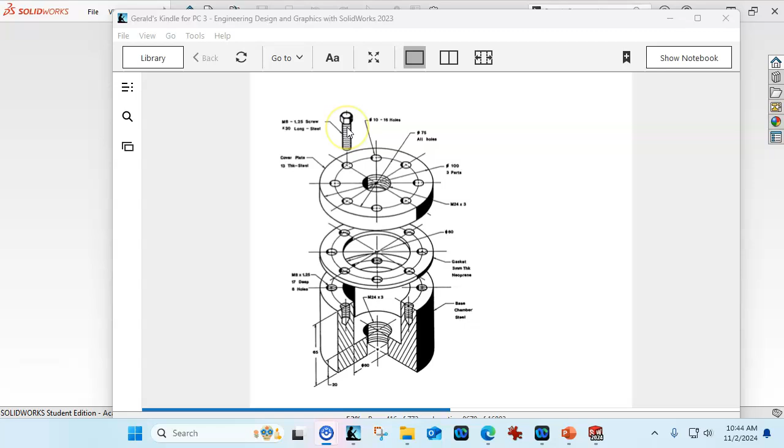So something like the hex bolts, we would add that to the assembly, but there are some limitations to the multi-body. So if there's more than about 3 or 4, maybe 5 parts, let's go ahead and open up the metric part. We're going to probably be better off with top-down. There is a limitation with the multi-body that at a certain point the complexity just doesn't help to build in more bodies. All right, so I'm going to draw the circles.

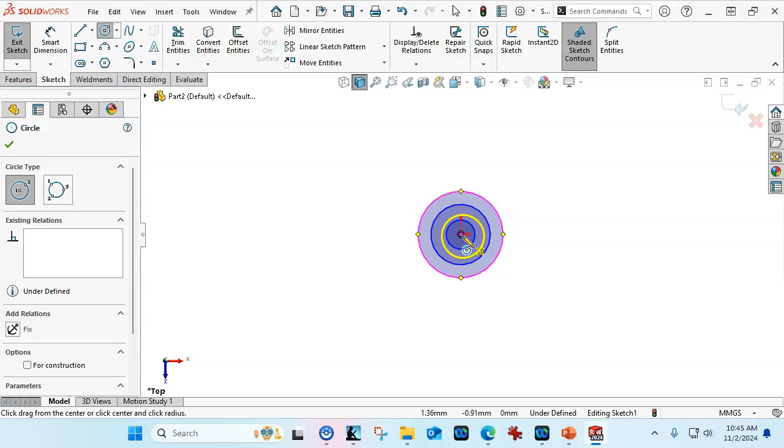So the threaded hole, the bore, the bolt circle, and the outside. So we should be able to go 100 and 75 and 60. And then we want the minor diameter for the thread. So 24 minus 3 is going to be 21. The outer segment, let's see, we had, just going to check the number. So this will become the bolt circle.

And I would like to go ahead and build in the pattern for the bolt. So just dropping a point, and then do a circular sketch pattern, and we can pick the point to pattern, and we want a total of 8. So we'll put those in.

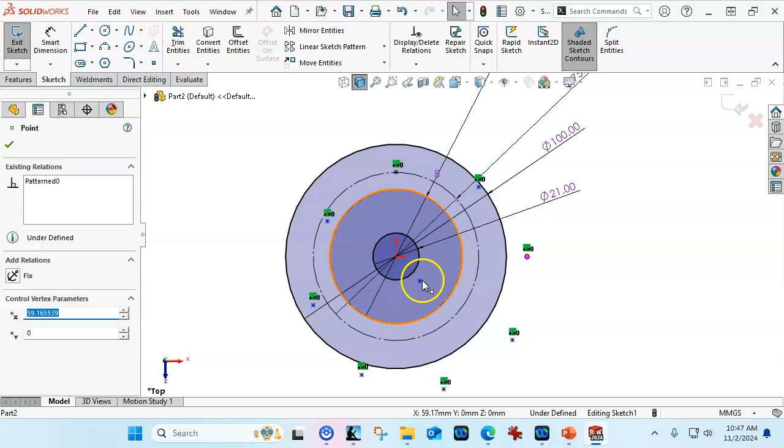All right, so the thing to be aware of is often the sketch pattern. Oh, I jumped before I could do it. Let's see if I can undo. Nope, it's going to drag that out. I think it snapped the point at the center. So, well, let's try that again. Let's see if my redo works. All right. Okay, so I can drag it out. There we go. The center point, if you're in the hole wizard, you do want to watch out for that center point because it's going to add a 9th instance.

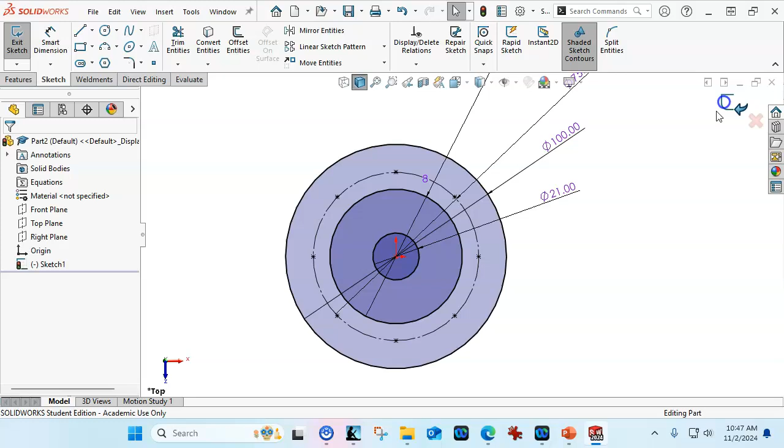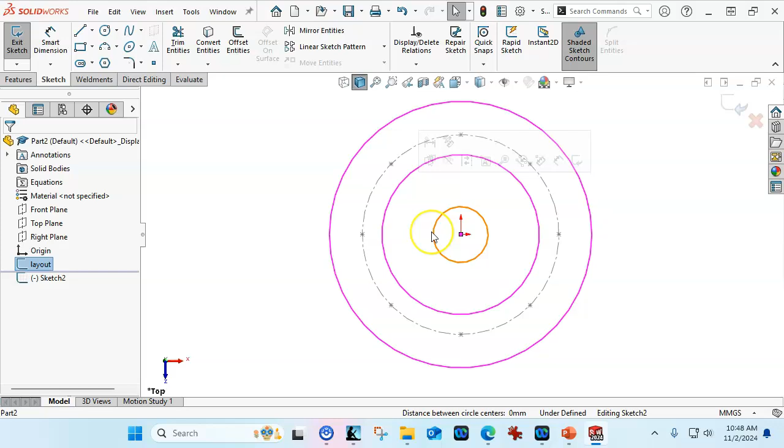Advantage of a regular sketch is that I can drag it to the origin and place it, and it's going to go fully defined, or I can drag any of the points back to my bolt circle and not worry about dimensioning the angles or dimensioning the radius out of that command. Okay, so out of our geometry, this is going to be my layout sketch that we're going to start making features. I would like to drive everything from this sketch, but I don't want it to be in the part, so to speak. So let's go with converting the entities, and we'll build those up with our geometry.

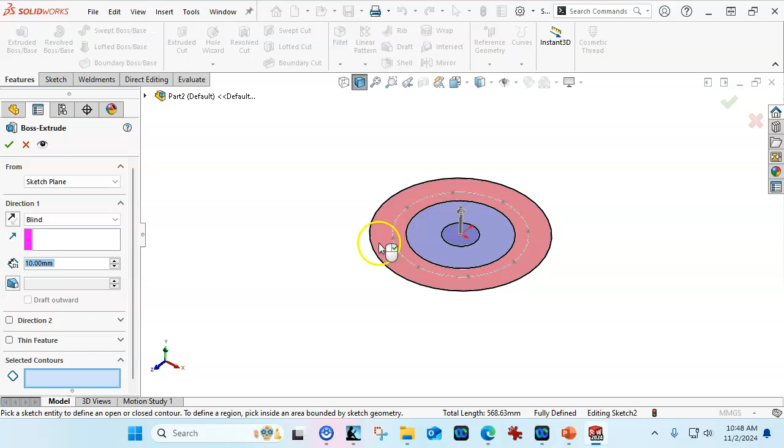So I could also make another sketch that has all the heights, but let's go ahead and extrude these out. So since there's multiple regions, we'll go 65 on the height, and then expand that out and share the sketch. So this is going to be our cosmetic thread side, or the side that we would add the hole wizard to. So let's go ahead and extrude that out. Sketch 2 automatically gets selected. I don't really like leaving those in there, so delete that out and go to 20 on the height.

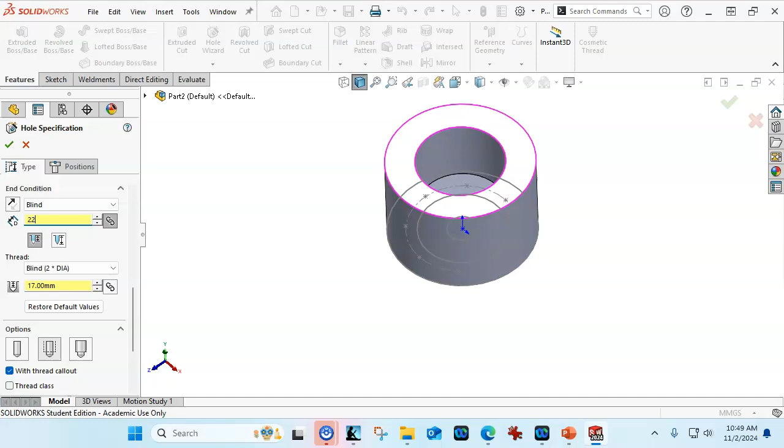For the hole locations, then let's go to the hole wizard, and we're going to pick metric bottoming tapped. We're at an M8 by 1, so that's a fine thread, and go a little more coarse. We'll go blind 17 millimeters deep on the thread. So then we should go a little deeper on the tapped holes so that there's more than enough geometry.

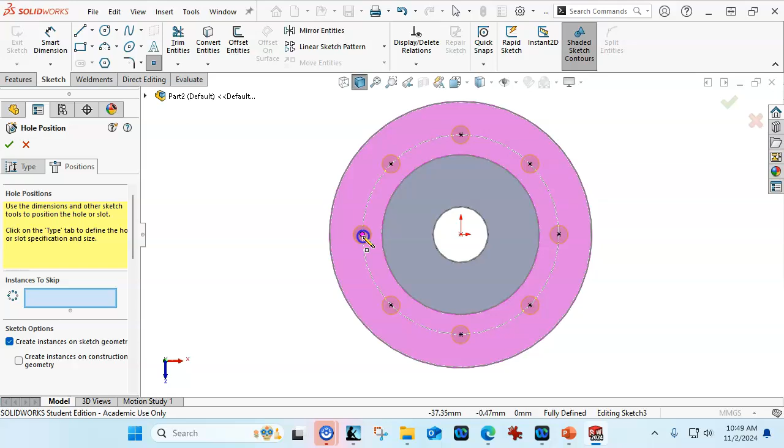All right, so if we get the 2D sketch, 3D sketch, we need to make a selection. Otherwise, we're in the point command, and we're just going to go along and add those points, making sure that they go coincident to our bolt circle. All right, so on this geometry, I would like to go ahead and add that to a new folder. So this is going to become the pressure cylinder base. This would also probably be a good time to go ahead and save this.

So let's find our way to our project folders, and we're going to do a new folder, assignment 8, P6-7, and this is going to be the pressure cylinder.

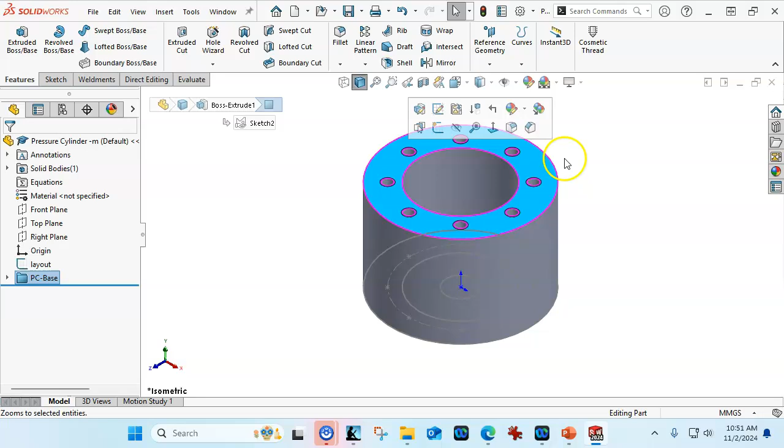And because it's a multi-body, I'm going to put a -M or some designation that lets me tell them apart. Because if I name the assembly and the drawing pressure cylinder, there's going to be associativity back to this part. So if I open up a sketch on this part, the risk is that if I delete or have to change this part drastically, it's going to affect the downstream parts.

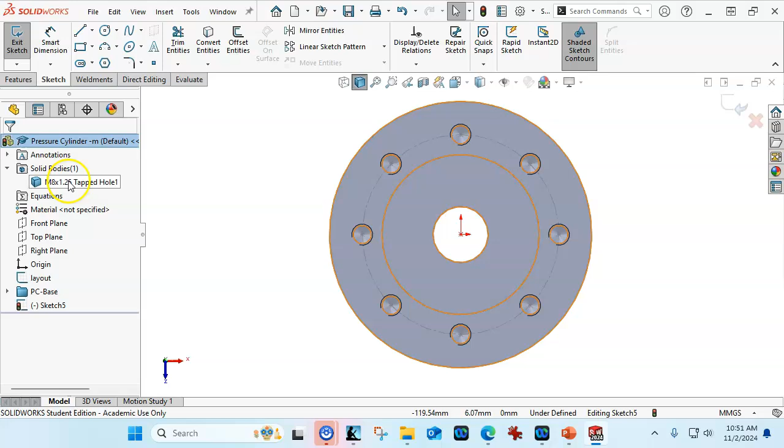So when we do top down, I like to have a single point of failure with multi-body, and maybe can mix it up a little bit more, but you're going to run into those types of issues with our geometry. So since I'm here, I'm going to go ahead and name this base and then hide it. So I opened up a sketch on the top of the base, and that's where I'll be drawing from.

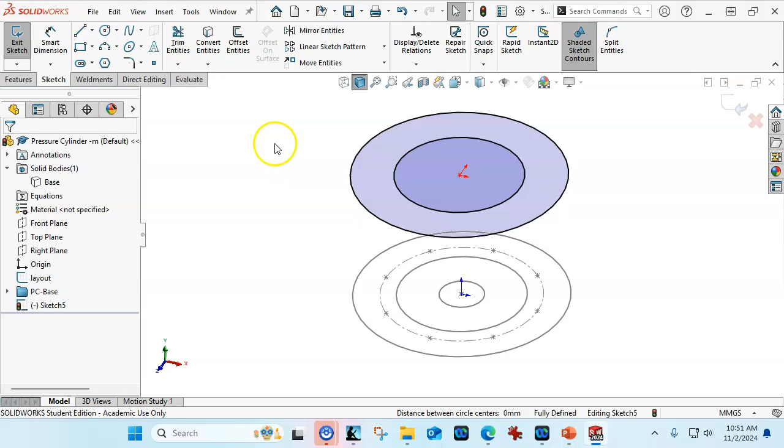And when I go to my gasket, we will convert those entities, and it puts it on top of the base, and then we can draw the circles. We've done Control C, Control V before. I could also pattern these, but if I do a Control C and a Control V, those are getting close, even though I'm picking, they're not going fully defined. So just be aware that on your geometry, you are going to have to go back and add those relations.

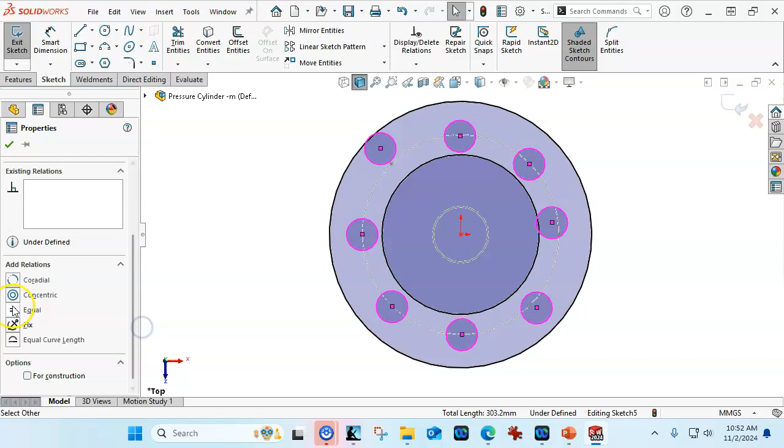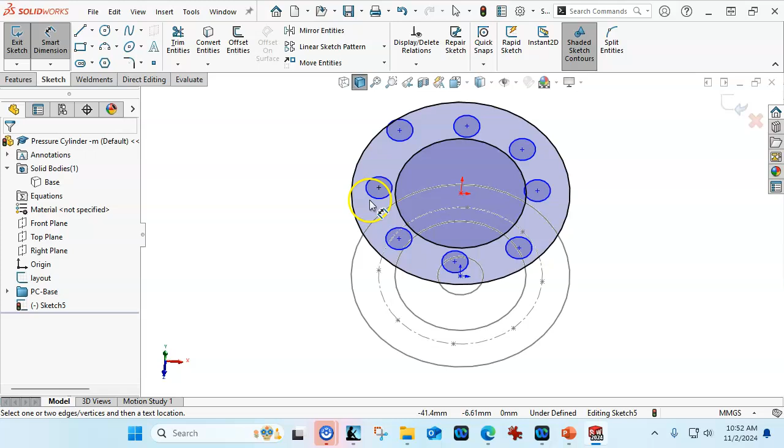So we're going to set all of these equal. And then for an 8 millimeter clearance on the gasket, I might even want to have a little bit of interference to the thread. And that does not look like it applied equal. I don't have anything in the existing relation. I don't think it grabbed it. So no, that one. All right, well the test will be to add a dimension, and we'll go like 8.2, and they did all change. So even though I was expecting to see that existing relation, it did get it.

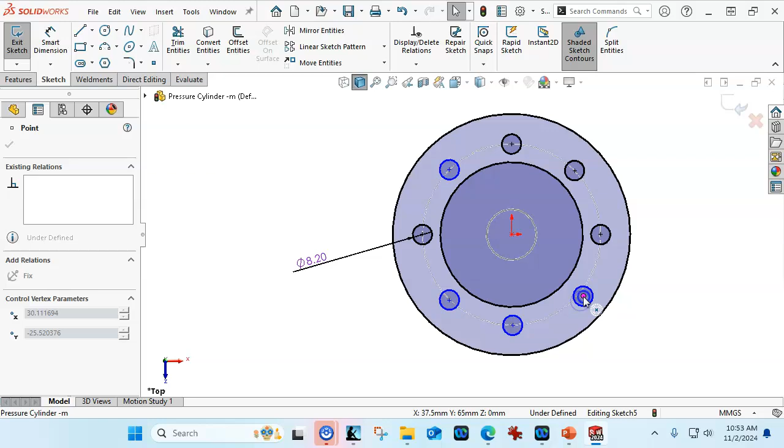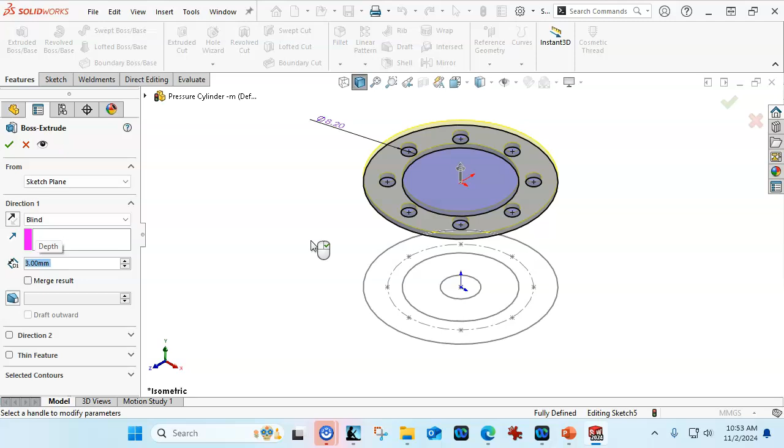So we're just going to go back and add these. So advantage is going to be to the sketch pattern, but if you want to tie it to these points or drive with these points, there are some options available. Okay, so that's going to extrude 3 millimeters, and we'll go ahead and accept it, and then that becomes the gasket. Okay, and once again, we'll open up a sketch on the top of the gasket and then immediately hide it.

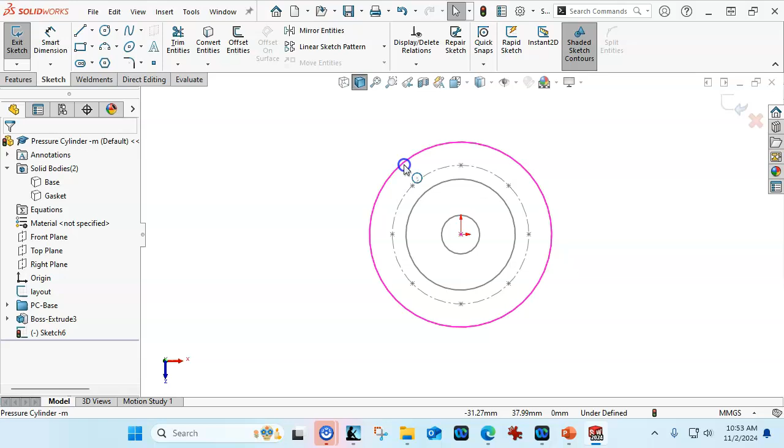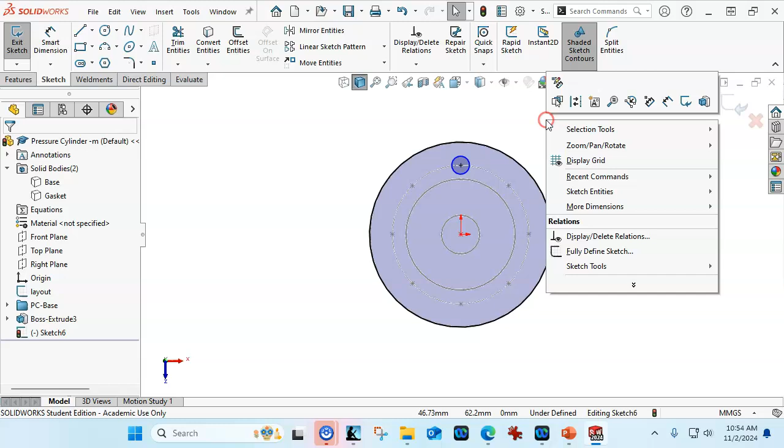And the cover then, let's go ahead and do the hole wizard on this one. So we can go with the convert, and then we'll pick up. Now let's just go ahead and do hole wizard on both of them. So that one becomes an extrude and 13 millimeters. And we go ahead and pick the face, open up the hole wizard, and we're going to do a clearance. So ANSI metric screw clearances to an 8 millimeter. It's going to go to 9 millimeters, which is a little on the high side if we look at the custom sizing. And we want to be up to next, but there'll be plenty of room.

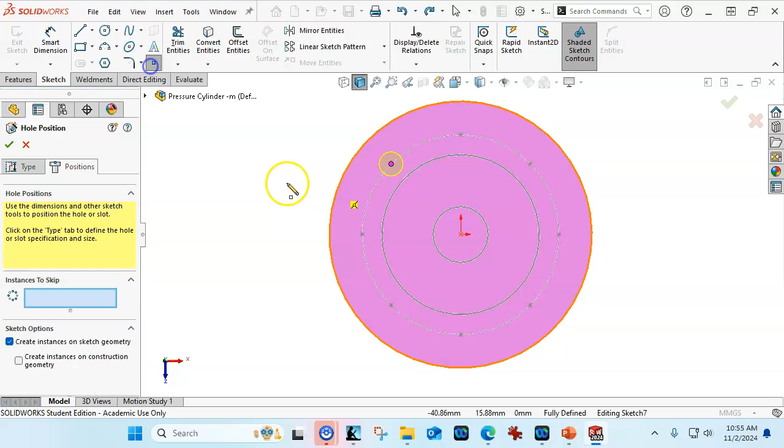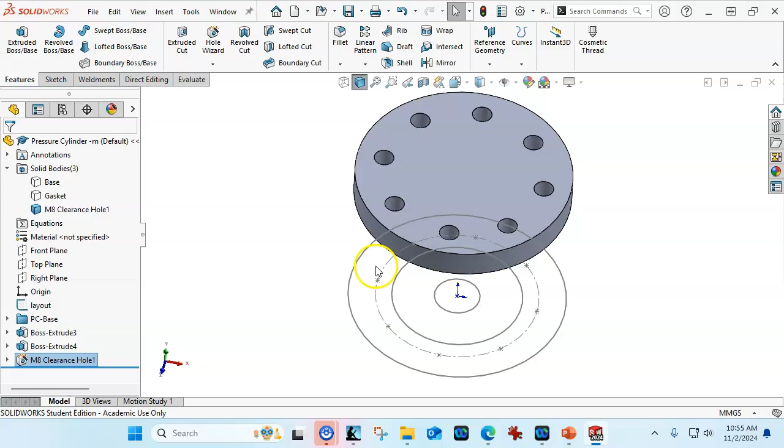So in this case, if I go back to the points, I would be interested to see, since we're in the hole wizard, if I do the circular pattern, and we'll just do the 8, and notice that there was no center point. So you do have to watch previous versions. The hole wizard did not remove that center point, and you ended up with an instance count that was +1. So again, I could do the circular pattern, or we can pick the points. And what happens is if this number changes, the gasket, the threads, the through holes, those all change with it.

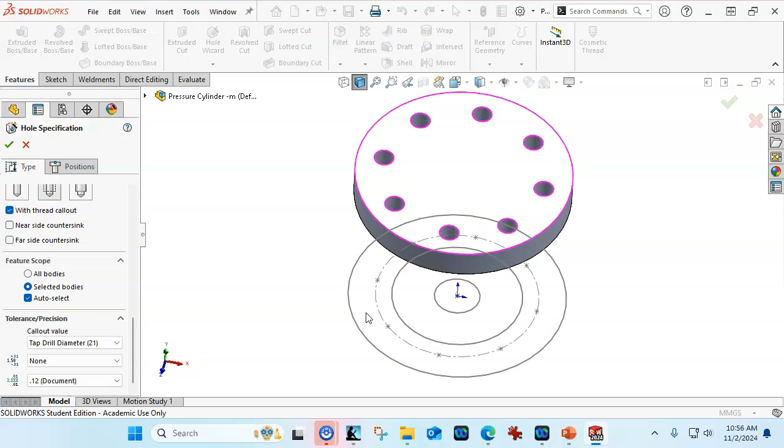All right, so for this hole wizard, we're going to go to the M24. Oh, we need to be in threads. So let's go ahead and pick and make sure that we're in metric. And we'll find our M24x3 up to next. One of the things we would want to watch for is the feature scope, because we're dealing with the solid bodies. The advantage of hiding those is that it doesn't recognize the other two parts. So when it selects, it's only selecting the shape. If the other two were visible, then it might pick the base as well. So we go and make the selection, and that's going to automatically add the cosmetic thread.

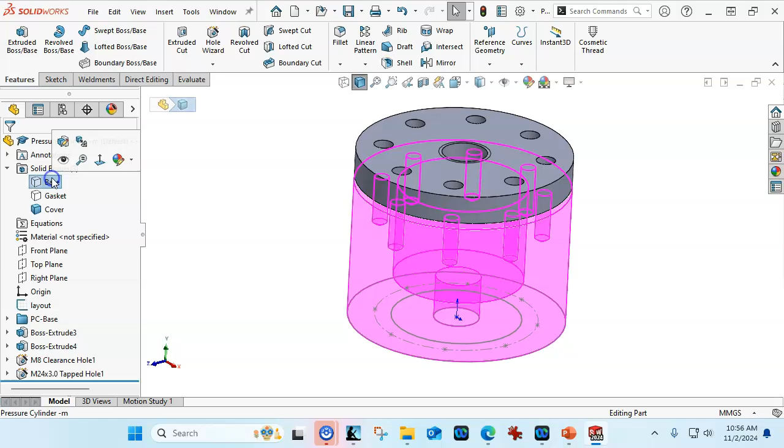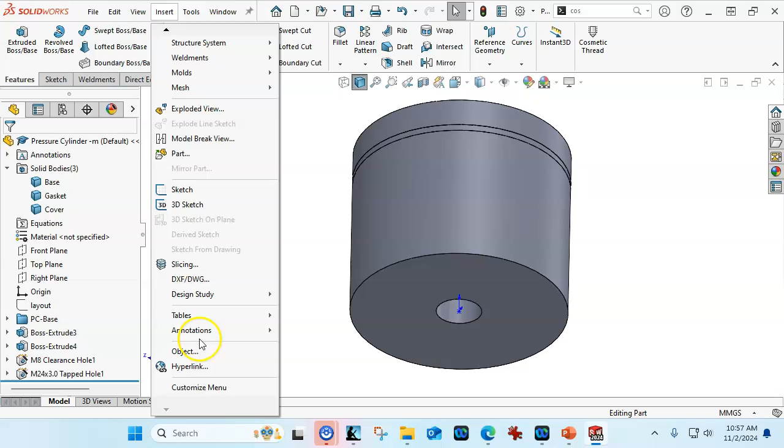So this one's going to be the cover, and we'll go ahead and make that capital. All right, so when I show these, you can just right click and show. We have all three of our parts. I can hide the layout, and then on the base, since I drew that one in, we would want to go, if we've added the cosmetic thread, to our command manager, or we can start typing it in to the search. And then the long way is to go to insert, to the annotations, and then to the cosmetic thread. So whichever one of those works.

We're going to find the geometry. It jumped M24x3, and it's going up to next. And I usually turn the show type off, because in the drawing I want it to be a dimension, not a note.

All right, so we're going to do Control-1 so I can see it from the front. And we'll make sure to save it. And then at this point, we can go ahead and export these. If this is all I needed, maybe I would even draw the hex heads in for representation.

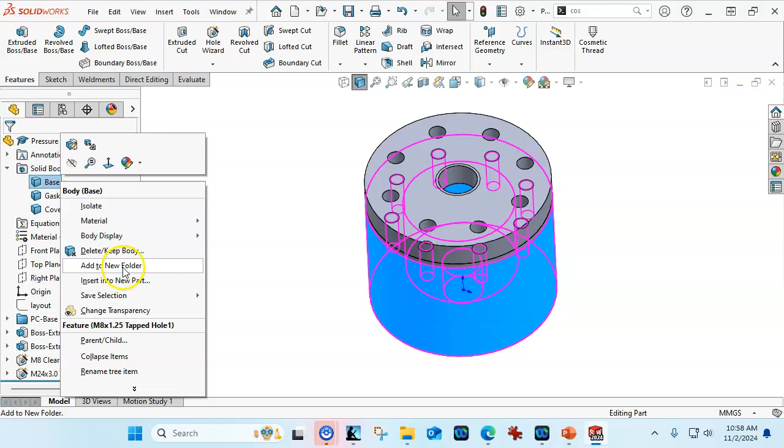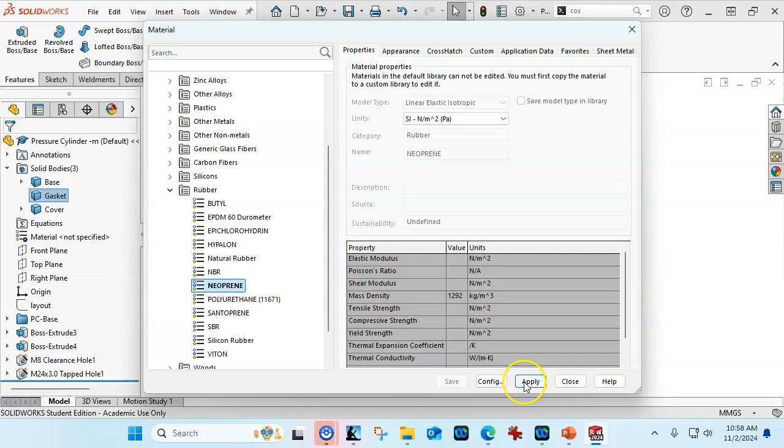But we can do things like on the base, we'll set the material to 1020, and we know the cover is also 1020 or steel. And then the gasket was neoprene, so we'll have to go into our material and edit. And we're looking for rubber, neoprene, and if I didn't know what category it was in, I could just type it into the search and have it find it. So there's our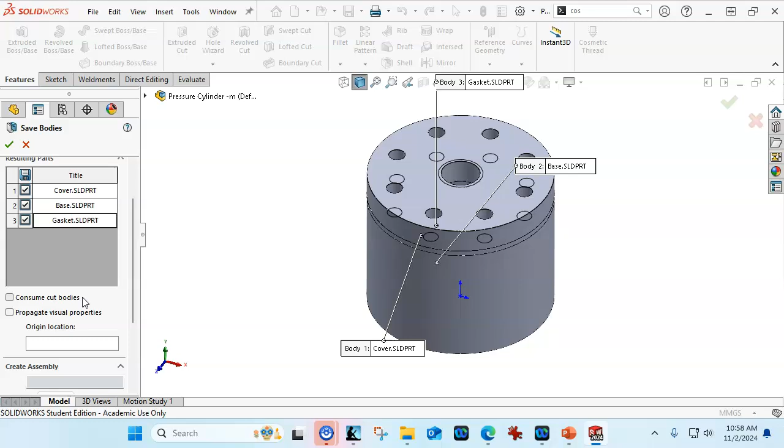pressure cylinder. And then we have the option of inserting into a new part, which would do an individual component, but the save bodies will grab everything, output them to their parts if we need it, and also then we can make an assembly. So if I browse, then we'll go to pressure cylinder. And we'll go ahead and accept that.

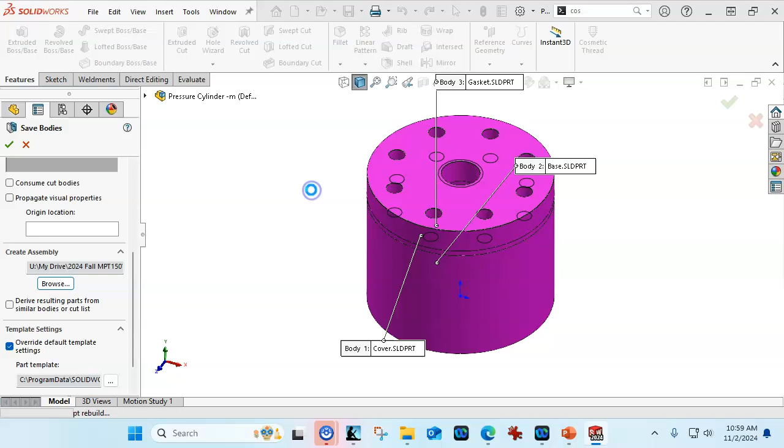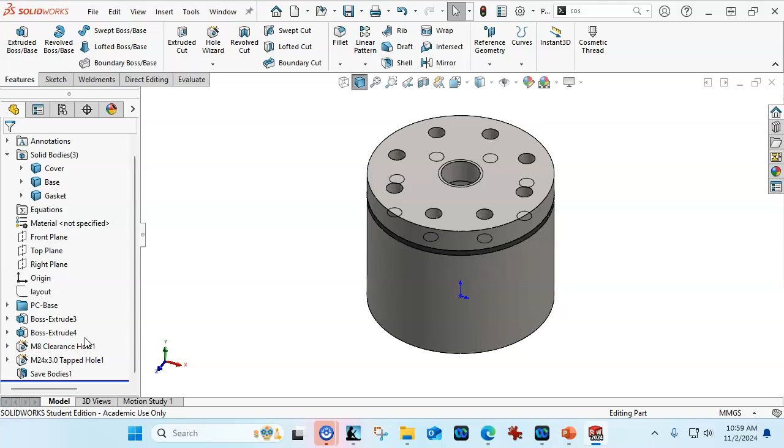And my default parts were apparently in, so it's asking me to update the units, and then it's going to add the save bodies. So the save bodies, we do want to be careful. We don't want to suppress in these because it renames to the last feature. If I need to add features or make adjustments, I want to do the rollback bar rather than changing the suppression state. So I can add them to a new folder.

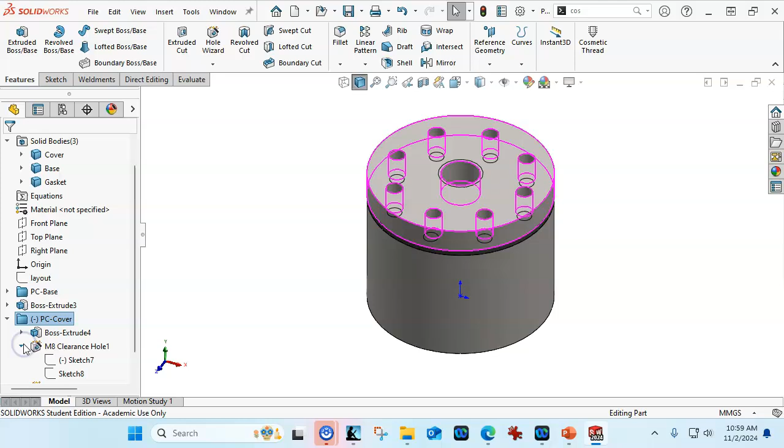That will be the cover. And then anything that I do after this, I got a minus sign, so where did the minus sign come from? So one of the clearance holes did not, yep, one of the clearance holes did not line up. So those minus signs are pretty important. So when you notice it, that's the time to correct it.

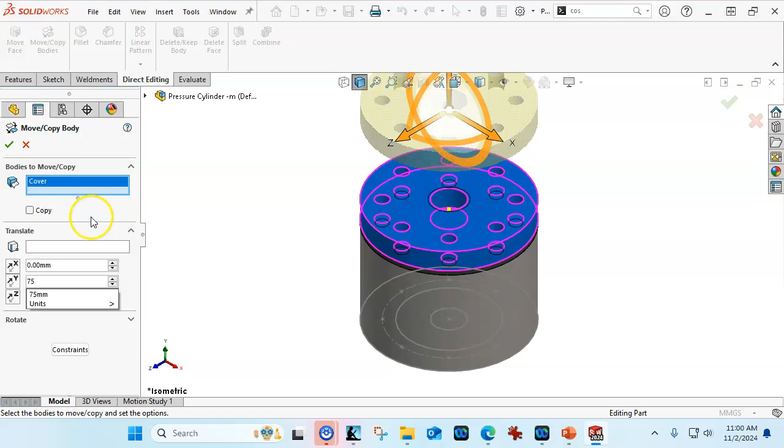All right, so anything that happens after the save bodies does not migrate back to the assembly. So like we go to the assembly, there's our part, and we do the rebuild. So if I were to go into my components and do something like the direct editing to move copy bodies, and it's not set to copy, and we'll go like 75 millimeters and accept it, then that takes place after the save bodies, where if it took place before, it would migrate downstream.

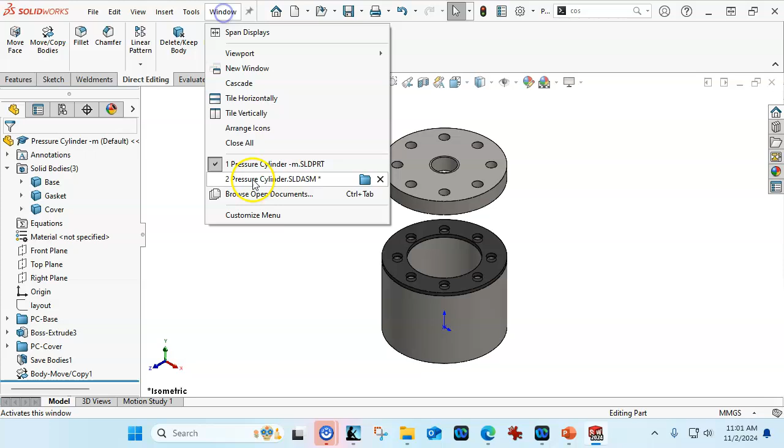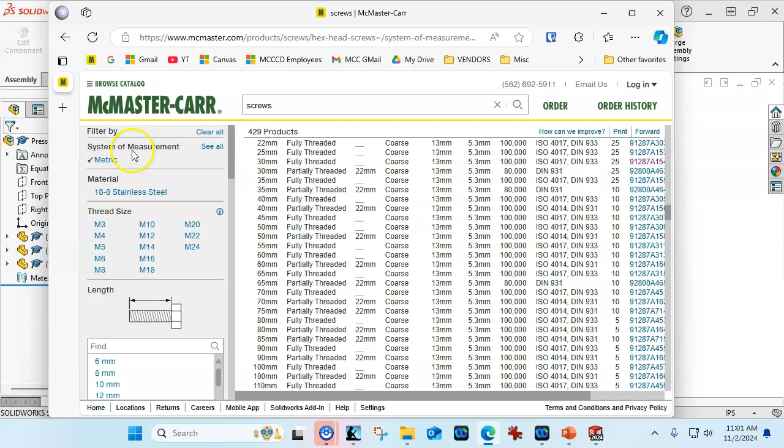So the suppression states after the save bodies, or we create a configuration, we could manage those outside of the part. Okay, so in the pressure cylinder, we want to find our, oh, it's up. So the McMaster, and let's just go back to the start and run through the process.

So the fasteners, hex head screws, looking for metric. Length, not so much, but thread size, I want M8s. I don't need super high strength, even though it's a pressure cylinder. I would think that an 18-8. One of the advantages of the 18-8 stainless steel is that it has good corrosion resistance, reasonable strength, and if I do manage to break one, it is going to be easier to repair the part, drill it out, whatever we need.

All right, so if I go to, did it jump? No. Okay, there's my part, M8 by 1.25. And if I tell it to download the 3D SolidWorks, then it's going to put that into the downloads, and I'm just going to go over and cut it and place it into the same folder so that I have access to it. Now you could use the Toolbox, but this is more of an example if you don't have the Toolbox in your license, or you need a special custom thread. We can

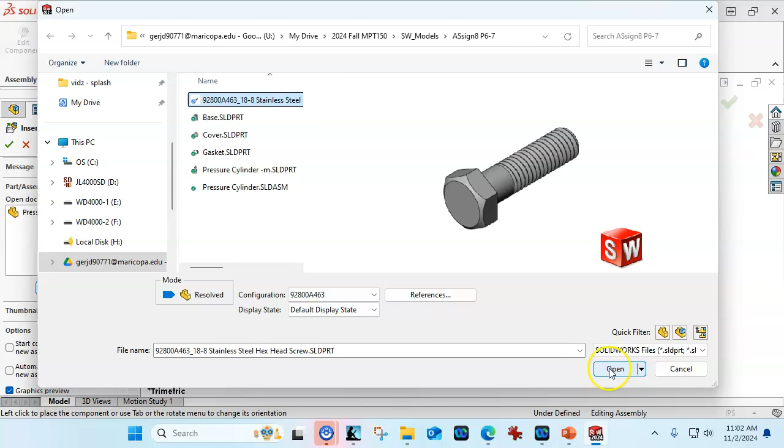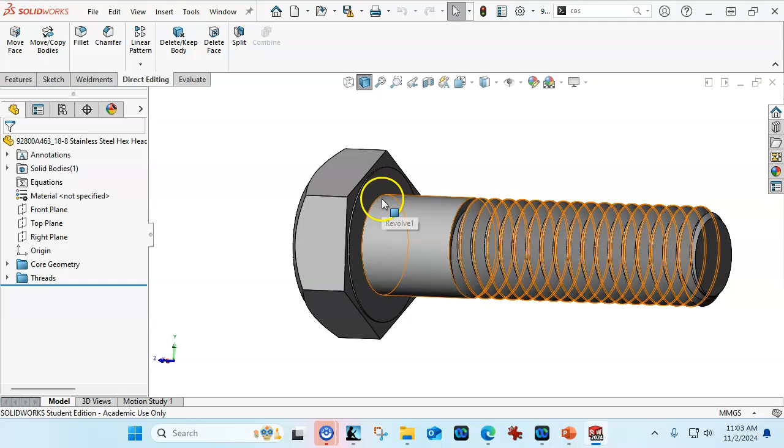generate that geometry. So one of the things I don't have is a mate relation, and this is probably an older version. So if I go ahead and open it, I would like to pick, oh, that actually had a little bit of shoulder on it. I didn't catch that. All right, well, if I needed fully threaded, I would go back and grab it again. Let's go to the mate reference and OK, and make sure it saves.

And partially threaded. So we do have to pay attention, partially threaded and fully threaded. So if it was, I think it made a difference. We'll see what it does. All right, so over into the assembly, we're going to go back to the insert. Now it's going to snap, and I'm going to be able to drag and drop, just holding down the Control button and dropping those in place.

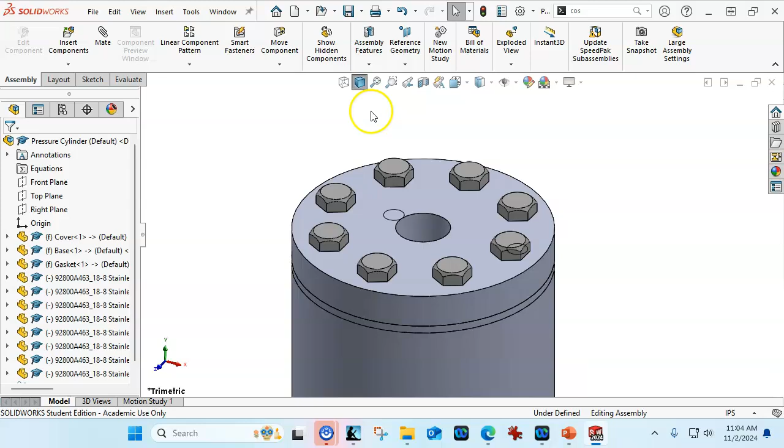All right, so because of the partially threaded feature, I do want to look at this in the front view. The hidden, partially threaded portion is not going to cause any problems there.

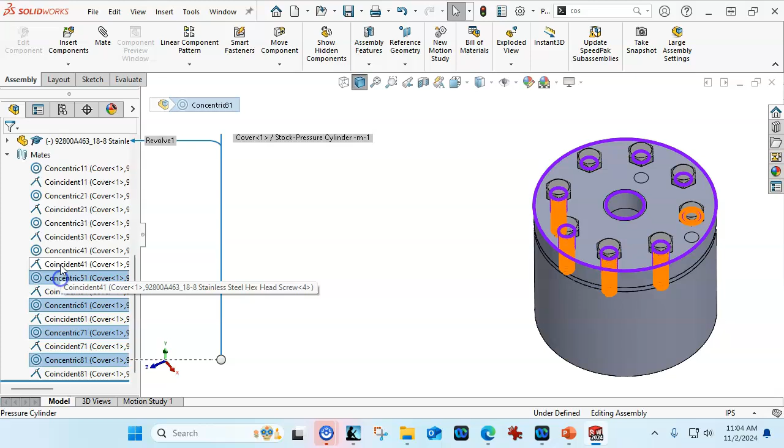Once we have that, we're going to create our exploded view. The exploded view here is not going to be the same as doing the move copy out of the part. Oh, and one thing for the mates, if you really want, those minus signs bug me, so if I go find the concentrics and right click, I can lock the rotation, and that'll just leave them in the position that they are. We'll go ahead and make sure that it saves.

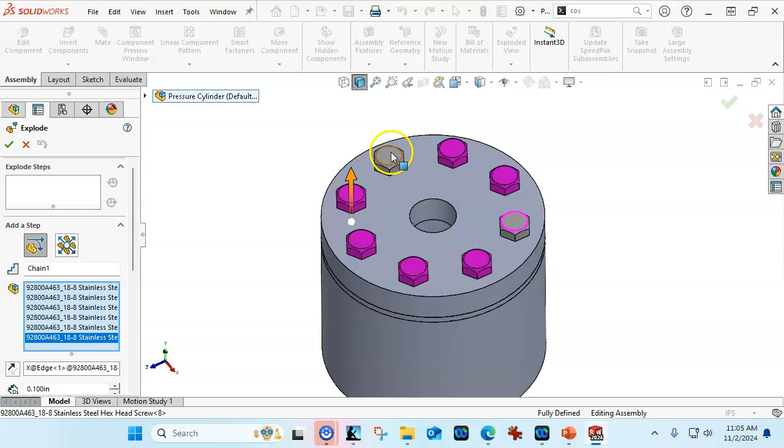All right, so into the exploded view, we'll go ahead and grab the bolts. Now it did pick a face, and I did not want it to go X. I do want it to go Z though, so let's clear the selections.

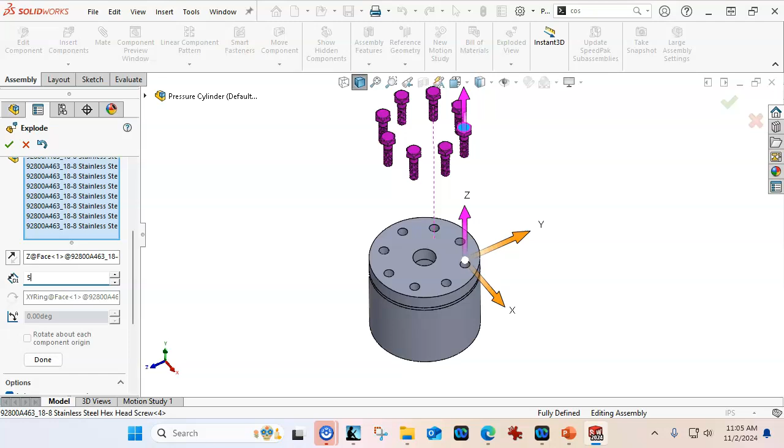Okay, it gave me the direction, but it still didn't like that one. So let's go back in and make sure that it gets selected. All right, so they all go out. We're an inch in the assembly, so 5 inches would be fine. And then we're going to go done.

And then the next group, we can do the gasket and let it auto space. All right, so if you wanted to do all of those at the same time, you can, but sometimes it's easier to manage the geometries.

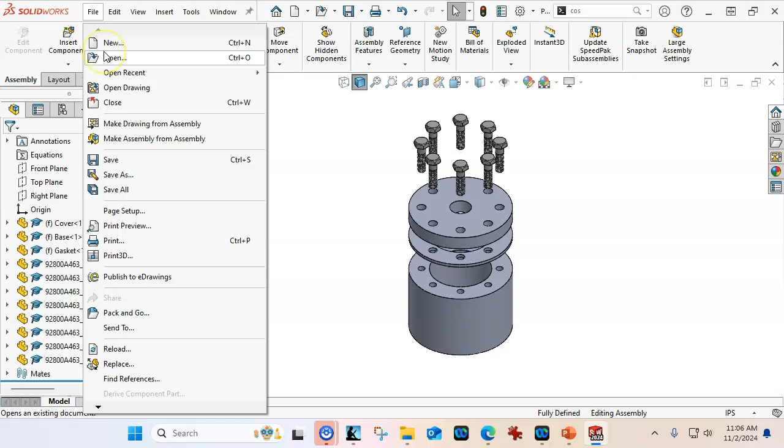All right, so we'll go ahead and save that and go into our, let's just do a make drawing from assembly, and we'll pick up the ISO A landscape template. You can use the ANSI A landscape. We'll bring in the isometric exploded. That looks a little bit on the small side, so let's go to half scale.

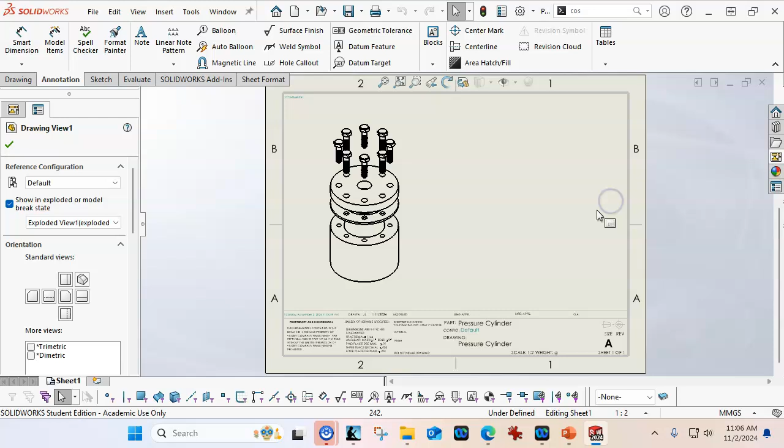And I want to go into the tables and pull up the bill of materials. So it has the standard, and it goes to all of the bill of materials. And one of these times I got to take the bill of materials that I made and put under my system.

Nope. Oh, that might have been it. Okay, part number, bill of materials, and then place it. All right, we'll rebuild. Now, would have expected that the bill of materials, we didn't apply any part numbers, but it doesn't look like the material was carried over from the assembly. Or I haven't opened the parts just yet.

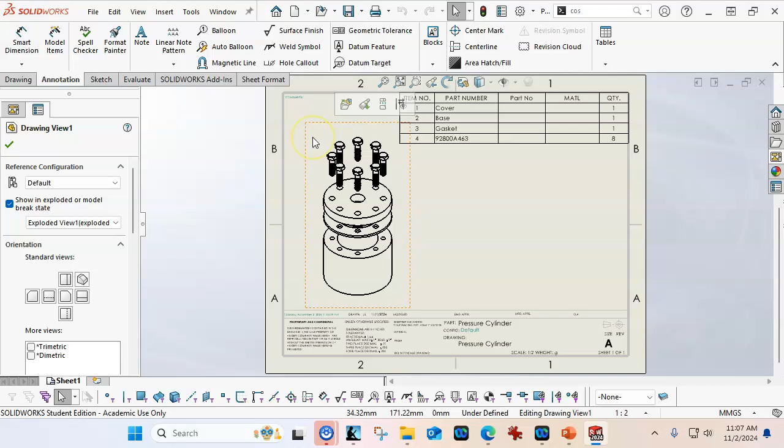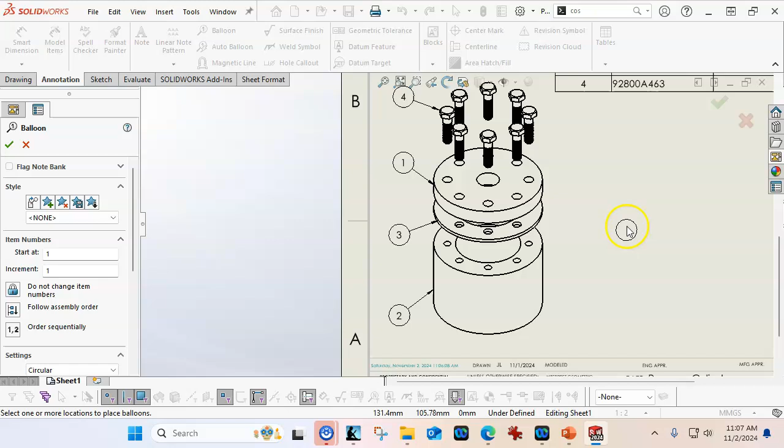All right, well, let's go with, we've been doing auto balloon. You can always add balloons individually. Before the auto balloon became more reliable, I would just recommend that you do the manual balloon, because it was about as fast as making the corrections.

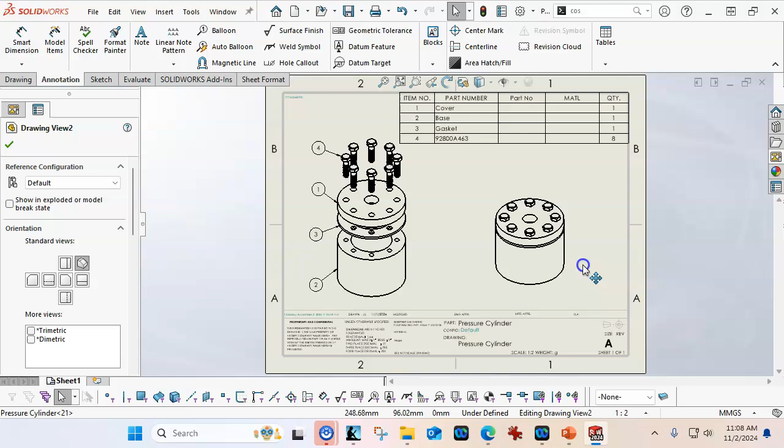All right, so let's go ahead and pull in, let's refresh, and we'll bring in an isometric view and go that way. So that little line told me that this is in alignment. It's not going to move up and down, which doesn't necessarily hurt anything, but we do want to watch for that. Go into the alignment and break alignment if you want to be able to move it and position it where you need it. Okay, so I'll save for the drawing.

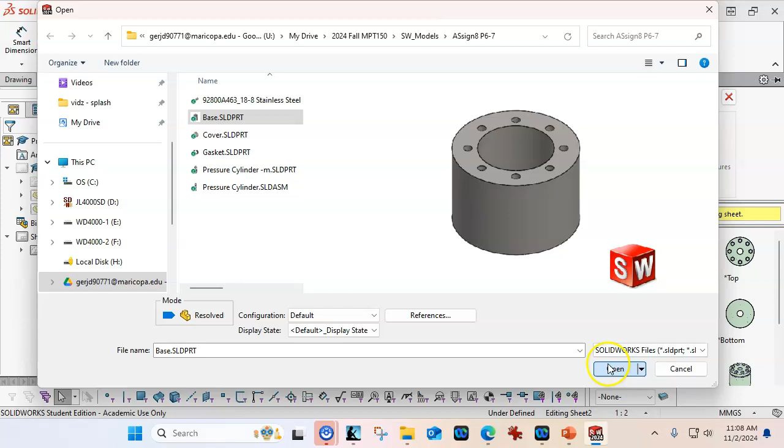Then that will update. We'll go to the top and the isometric, because I want to go into the section view. So our drawing, the section view, and we'll put that in place.

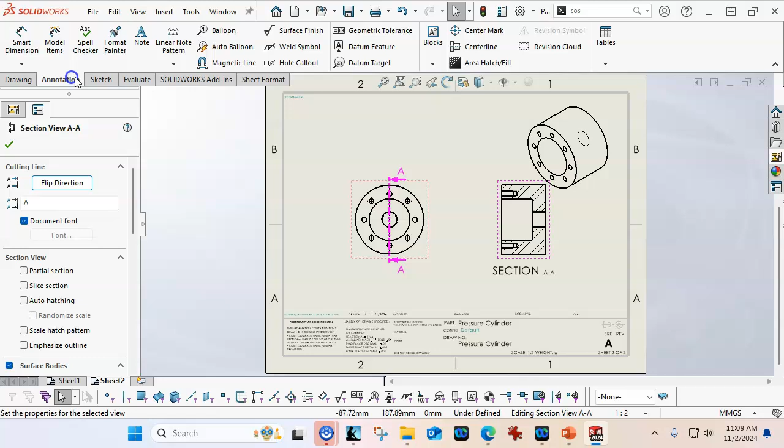All right, so under the annotations, I've had issues before, so I want to check. Notice that the associated part, the surface body, has a depth of minus 1 meter, 1,000 millimeters. So that's not a good way to go.

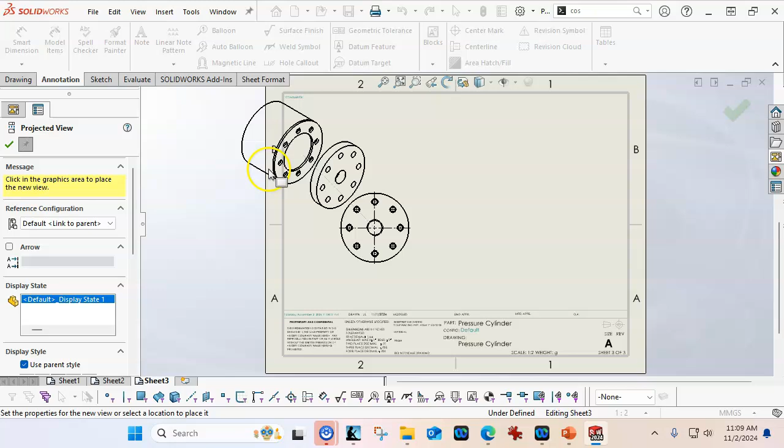So if we go back to the original, and if I did not create the assembly and the separate parts, I would just be bringing in the multi-body part. We can do the same thing. We'll bring in the top. Go ahead and set the isometric.

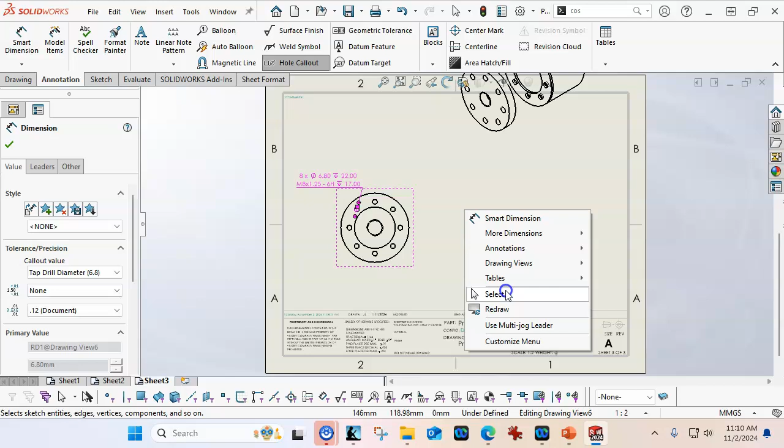But then on this view, I want to select the view, go to select bodies, and then I'm just going to pick the lower. All right, so that brings that in. And when I add the hole callout, now it has the 22 millimeters. So it's just something to watch out for, some of the strange things that happen in that associativity.

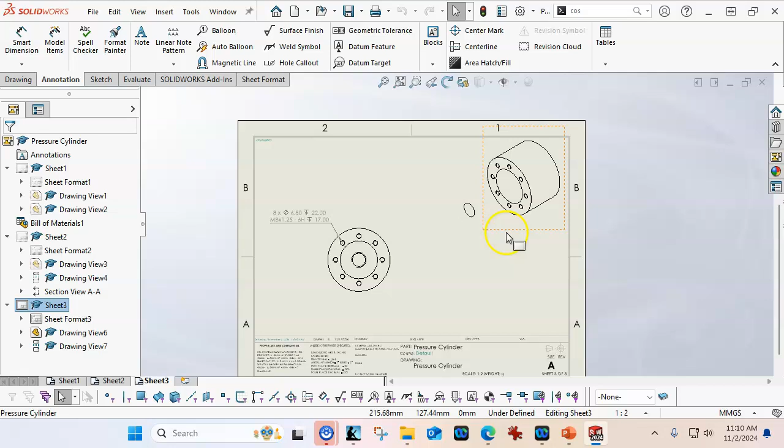So once more, select bodies. We'll select the view, select the bodies, go in and select the component. And the cosmetic thread came with it, so let's see if we can... Now it's not letting me select it. There it is. Well, I thought I had it. Let's see if we can hide just the cosmetic thread. All right, so a little bit of cleanup there.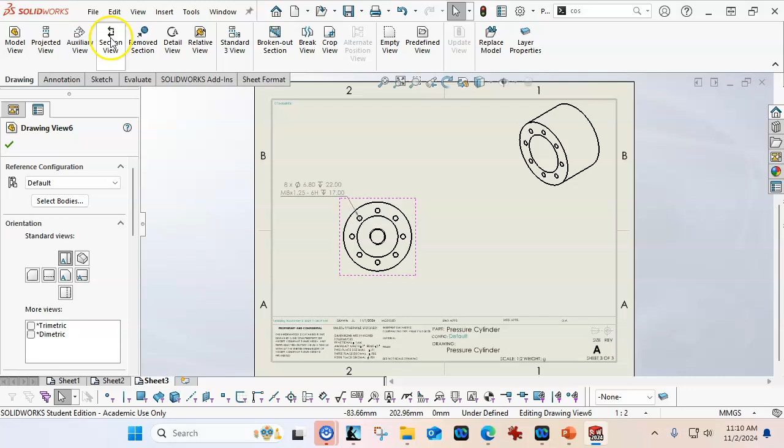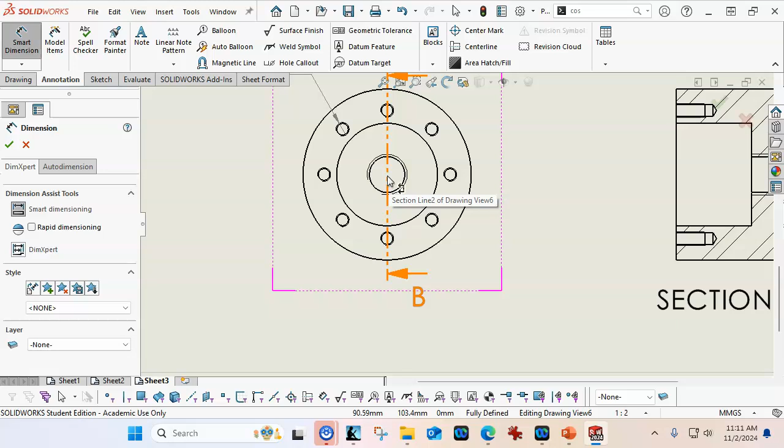All right, so let's go into the section view again. We did not bring in our center lines. I do want to demonstrate one way of bringing the angle, and it depends on if I can find the center here. It looks like it's going to override to the section view though.

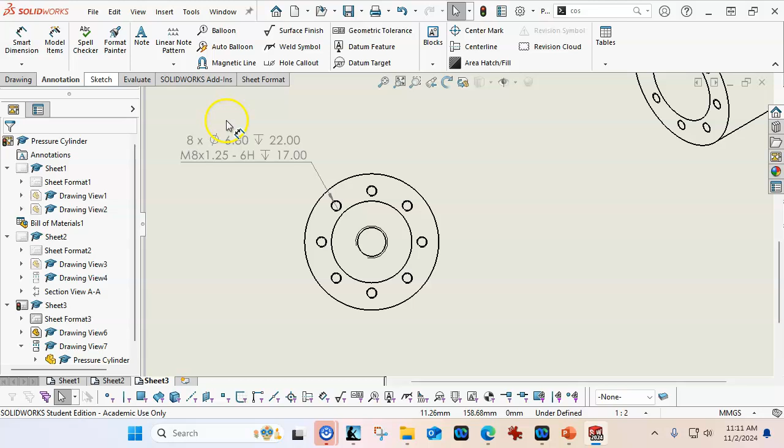So to that point, it's not picking that. Let me undo just for this illustration, and we'll go to the smart dimension. It doesn't seem to be picking up my center points. Finds that one, finds that one.

Well, because I really want it there, we're going to go point, point, and should be able to get one more. No, it looks like it's going to fight on that one.

All right, well what I'm looking for is if I can get those 3 points to select, I can get it to go to an angle. Worst case, I'll just draw in the center line.

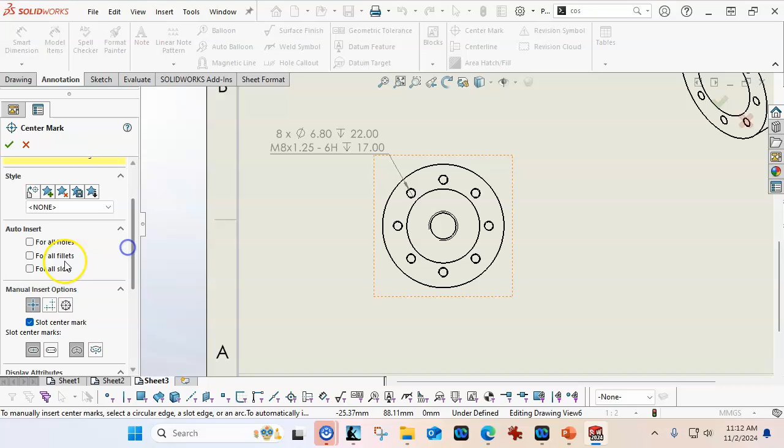So while I'm here, I'm going to go ahead with the center marks, and we're going to go for all holes and accept it. Now, I did not put it on the layer that I wanted, so I can go into my filter and we'll pick all of those. I think it's a better habit to do it out of the property manager.

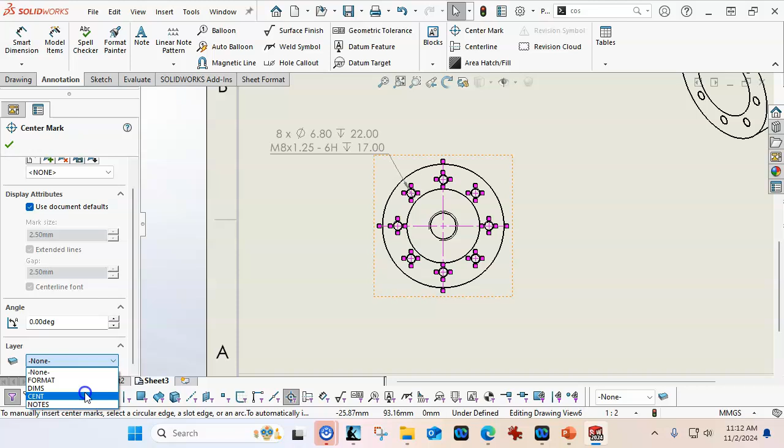I'm pretty sure I could pick it over here on the list, but now that I've finished the filter, I need to go turn it off, or hit F5 to toggle it off. And then in the drawing, we can go back to the section view, and we'll hit OK.

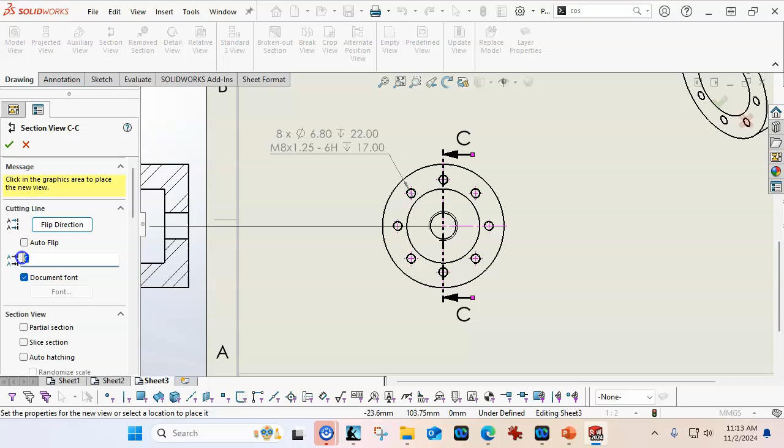So now that I've done that a couple of times, let's switch it to A - no, A is not being used. One of these times I have to fix the font too, but that gives us enough of our geometry that now I can go in and start adding the dimensions.

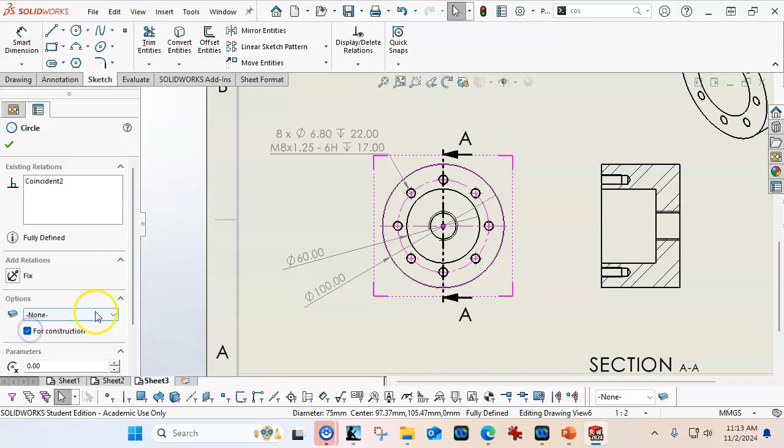So, 100, 60. I would like to have a center circle, but there isn't really a center circle. So we draw the circle, we switch it to for construction, we put it on the center, and go ahead and accept. And then that gives us something to dimension to.

And yes, it's going to be driven. And I would also like to put the note that that is a bolt circle or a base circle.

Okay, maybe not that way. Here we go. All right, so we have the 8 times, we have the bolt circle equally spaced, and our depth and the through.

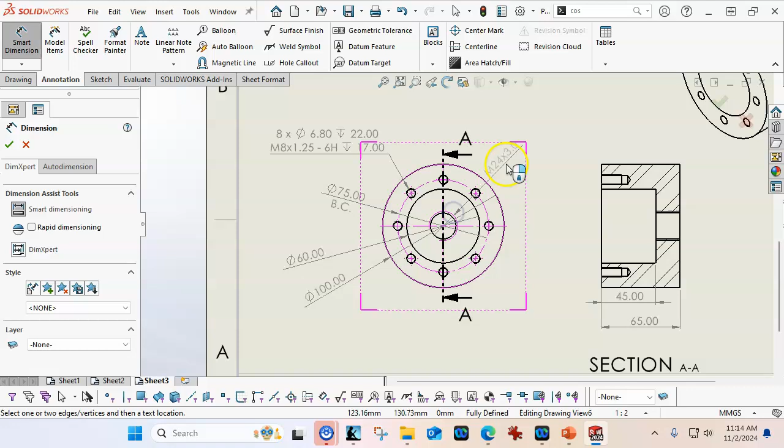So that leaves then on the annotations, if we go to the hole callout, we should be able to find - so that one went to the 21 by 20. So let's go over to the smart dimension, and even though it didn't call it out quite the same, we're going to see the difference and the advantage of the hole wizard.

All right, so let's go ahead and bring in the cover. Shouldn't have the same issue, so we'll go to the ellipsis, grab the cover. I'm not going to do the gasket because it should be a purchase part. If we have to make one, then we'll detail it.

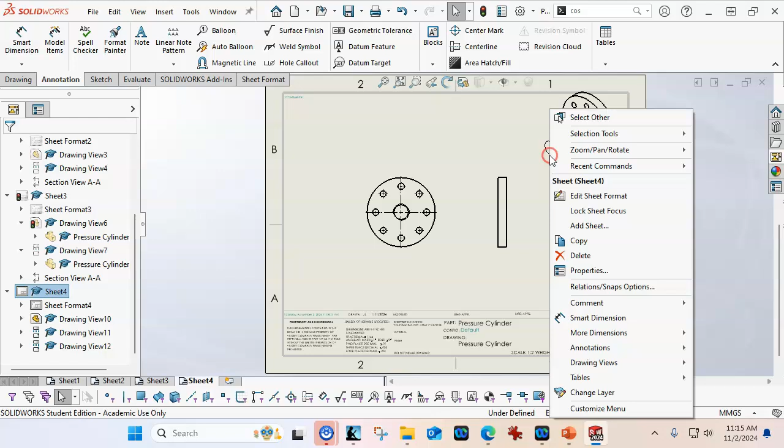So side view, same thing with the cosmetic thread. Make sure that can highlight, and hide.

All right, so on our dimensions then, pull those. This time when I do the hole callout, I get the 21 through on the M24 by 3. So that's the primary difference between drawing it in and using the hole wizard.

And if I do the hole callout, this should be the 9mm through. If we go with - let's see if this one will do the example of the centers. Yeah, it's still wanting to do just the linear distance.

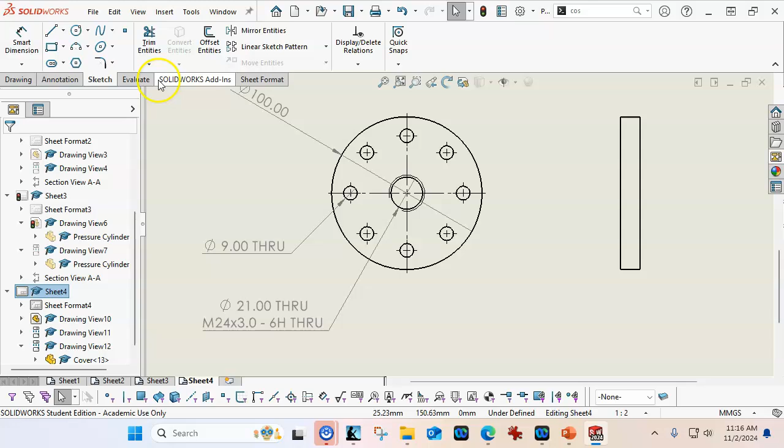When it works, pretty good. When it wants to put up a fight, not so much. All right, so center point to center point. And let's see if I can go smart dimension to the angle, and we can use the center line to generate our angle just the same.

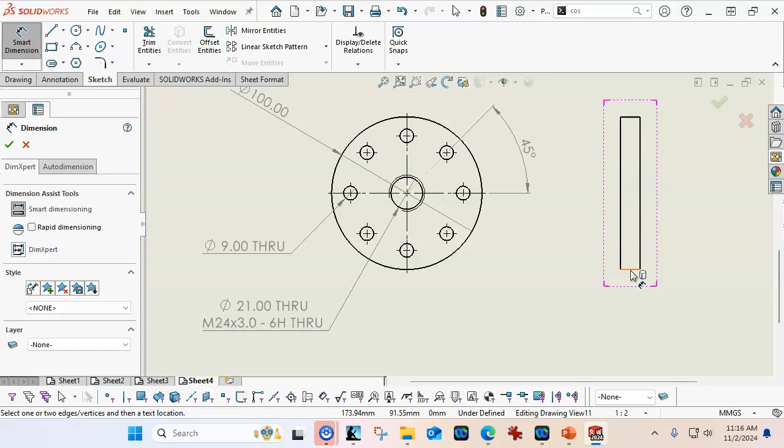Make sure I can get the thickness in there. All right, so there's a lot of little tricks and traps in the detailing and the model, the multi-body models. So we do want to watch out for notations. We want to check the instance counts.

So in this case, it didn't do the instance count for me. So if I modify the instance count, yes, I typically put the times 8 times in a large X. That kind of is a signal that I manually modified that.

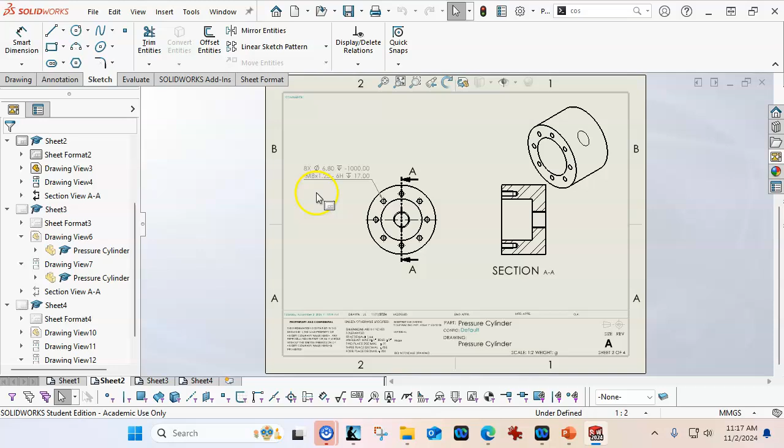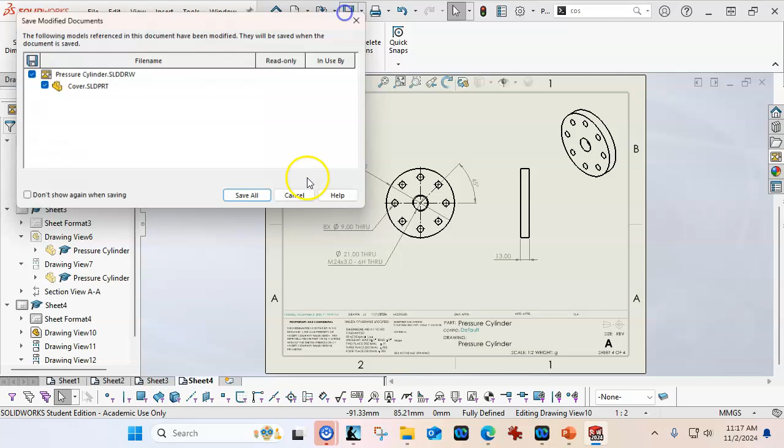Where if we come back over to - what is it, this one? Well, let's see, 9. No, that one didn't do an instance count either. So if it does an instance count, it does it at a small x. So, and it's warning me about altering. Okay, so one more save, and we'll call that good.